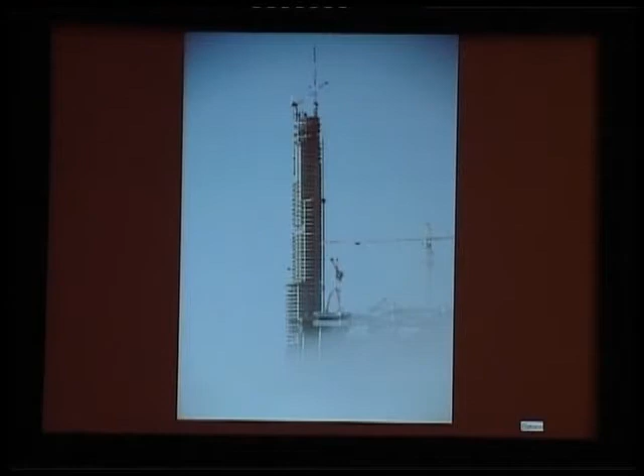is that there's only one main road through the city, Sheikh Al Zayed Road, and the problem is that the buildings were getting built before the infrastructure and the city itself. And so what happens is that you have a place that you can't get around in to go to buildings that are quite dramatic to look at, but there's really no street life that's worth living. And it creates a lot of problems in the long term.

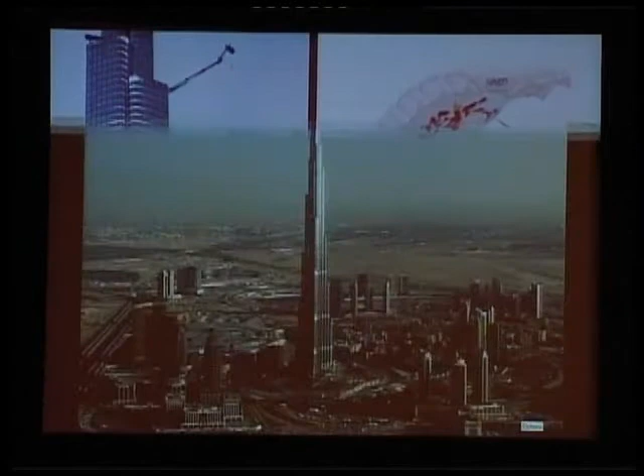And with the opening of the Burj Dubai, now renamed, they've achieved a great spectacle, and you know, here they even had people base jumping off of it at the opening, which is quite high in the air. But one of the issues that is a real thing is that in the exuberance of doing this, they never paid a lot of attention to how you get around.

So you have Sheikh Al Zayed Road here, they have a loop road in here, and a road connecting over here, but this loop road is going to become like downtown Mumbai. It's never going to be able to handle the capacity of the area, and so they've borrowed into future problems because they didn't pay enough attention.

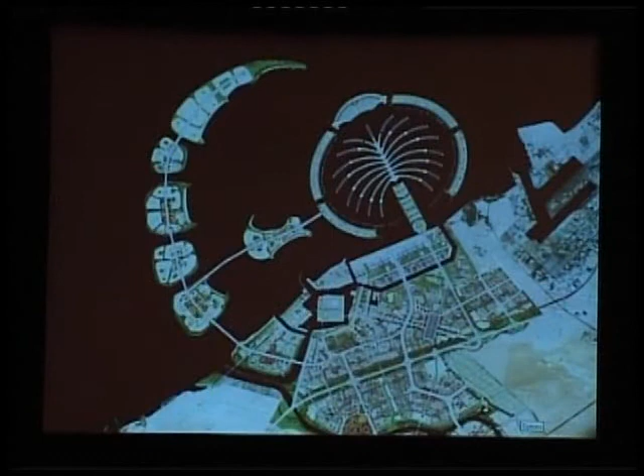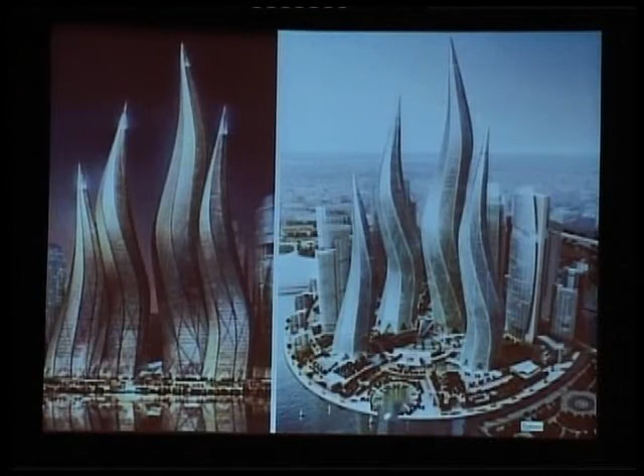At the Palm Island here, at least they have a people mover system, and just to conclude on this part quickly, this era where the buildings got wilder and wilder, competing for attention, all kind of wound up with a big collision that we've had recently. And the collision is basically a combination of primal forces, and they've changed the world.

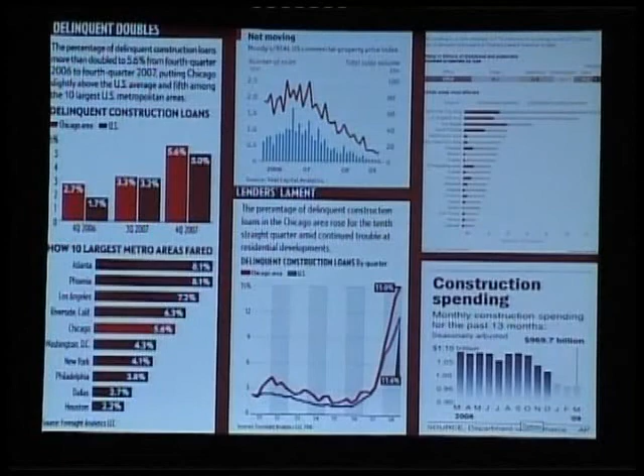And the first force, of course, is the economic one. We finally got to the end of our rope of exuberance, and we ran out of money in most places. Not in China, not in other parts of Asia, which is a good thing, but even China had to dump billions and billions in order to work on infrastructure to keep things at a good pace. And they've actually succeeded quite well, I believe.

And the next one, of course, is global warming, which everybody is talking about now, but the need to act is quite more dramatic than just the talk. And one good example of that is that, you know, I think it's fabulous that China and India and places in Asia are succeeding and getting wealthy. And we're doing a lot of work in China. We've been there for 6 years.

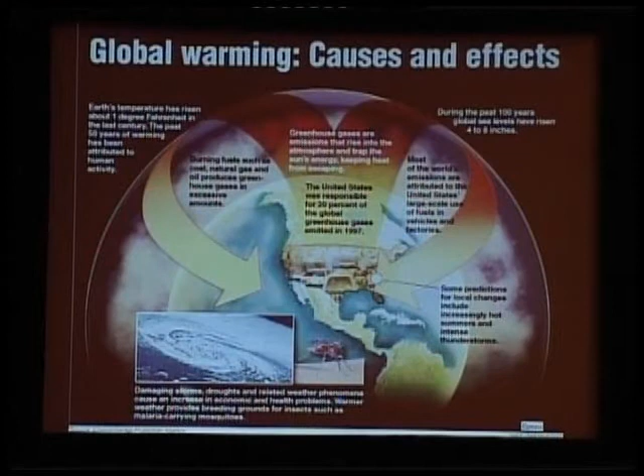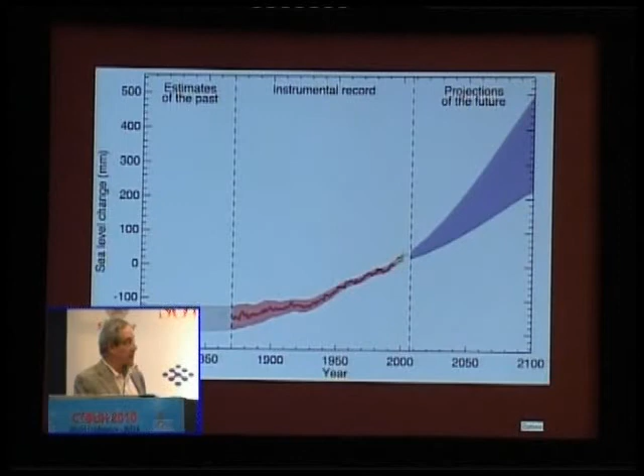But wealth brings with it the ability to buy cars. So you've already got gridlock in both China and in India, and the pace of buying cars is only going up. So there are significant issues we got to talk about. At the same time, drinking water is going down. Water is a great issue in terms of the consumable side, and it's a great issue on the business of water in the environment, and this is about sea rise, okay? So on one hand, we got too little water. On the other, we got too much water.

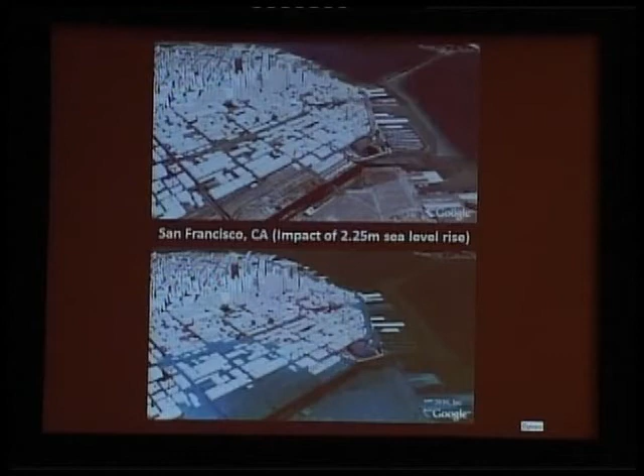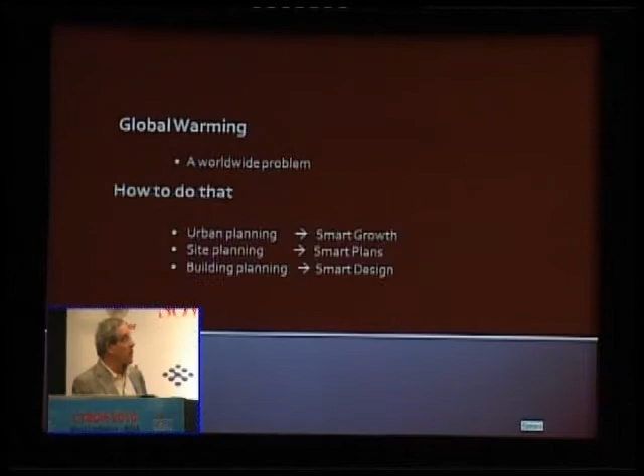So at the end of the day, sustainable buildings alone are not enough to save the world. We have to develop policies and practice sustainability on an urban and on a regional basis. So just some of the points that need to be focused on about global warming is that the main cause is carbon dioxide, which creates the issue of the heating of the atmosphere, and that's all coming from cars, buildings, and other forms of activity in life.

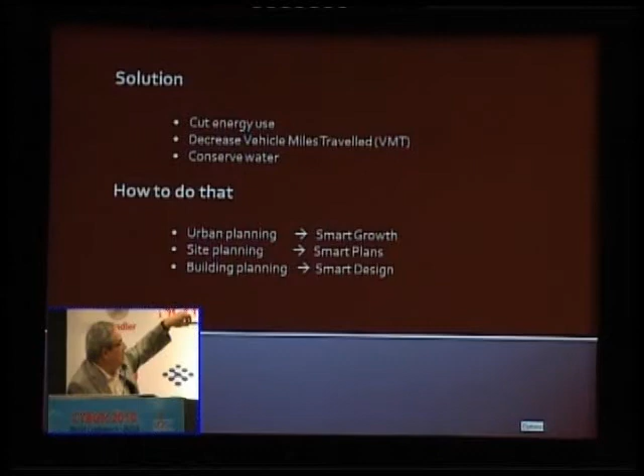And the solutions are a series of elements which have to do with how we deal with these things, but what we can do as professionals is deal with the urban planning issues and smart growth and site planning, and making smart plans, which I'll get into a bit, and then smart design in the buildings themselves. And these are the principles that we talk about. I'm going to be brief about these.

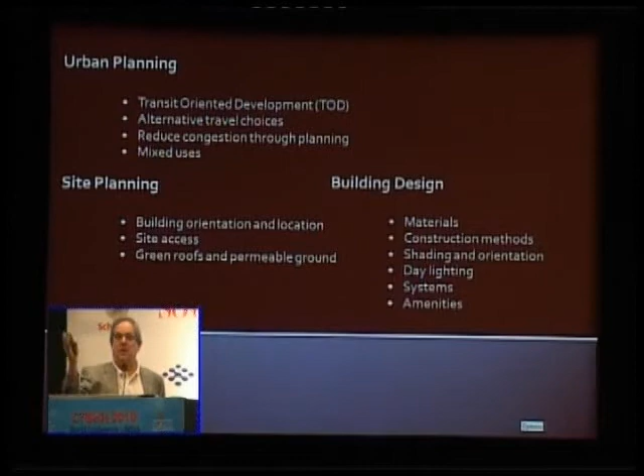But in terms of smart planning, transit-oriented development is really the main key to helping change the world, because what you have to do is get people out of cars. And the fundamental principle about getting people out of cars is convenience. If you don't have convenience in your transit systems, people won't get out of their cars. If people are in an hour-and-a-half traffic jam to go to the center of Mumbai from here, and there's a convenient way to do it, they'll do it if it saves time and it's convenient to access. So that is a critical piece, and I'll talk about that a little bit in the Guangzhou plan.

Just in general terms, the number of cities that are engaged in America in green building programs and site planning is growing all the time, pardon me. And the number of people living in green cities, in cities with green policies, is expanding all the time. And we need to do this as fast as we can.

So let's talk about Guangzhou. Guangzhou is divided into two parts, north axis and south axis. We were invited by the mayor to work on the north axis of Guangzhou. He came to me and said they had a new plan, but he wasn't happy with the plan. It was not sustainable. It was more formalistic than sustainable. What could we do about that? And I went to Guangzhou, and what did I see?

I saw that cars have more importance than people, and so they're taking all their streets and they're putting dividers in them so that they improve the traffic flow, but it means that people can't get across the streets. And so what do they do? They have to jump over the fences and so on. And they've done exactly the wrong thing, which is they keep trying to solve the car problem.

And what I've told them, and what I would say here in Mumbai, the same thing: you cannot solve the car problem. You will never solve the car problem. It's only going to get worse, so you must solve it by thinking alternatively. So in Guangzhou, what they did was they just separated people from the street and made you go through pedestrian tunnels to get around.

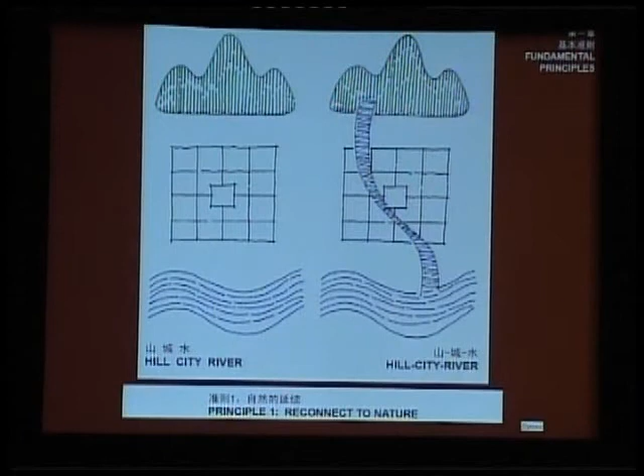So you have to start really at the beginning and reconnect the city to nature as a fundamental principle, but you've really got to believe in that. I mean, you can't just say it. You have to believe in it. And in Guangzhou, water, nature, are the things that tie it together.

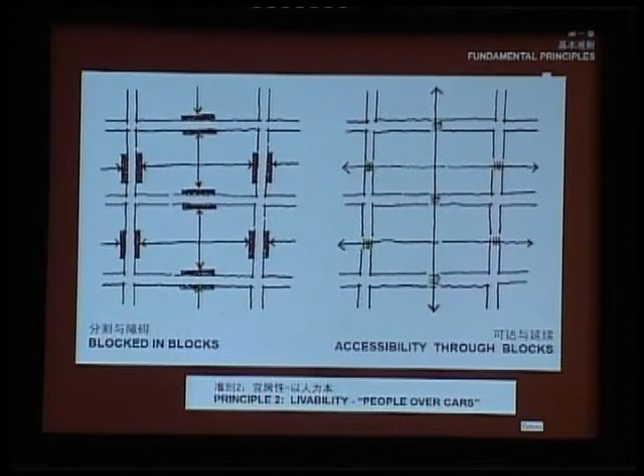The other thing is you have to give up the idea that cars are more important than people, and you have to make people and their getting around more important than cars. Easily said, but extremely hard to do. Extremely hard to do. And then, as Bernardo said, you have to deal with the heat island effect.

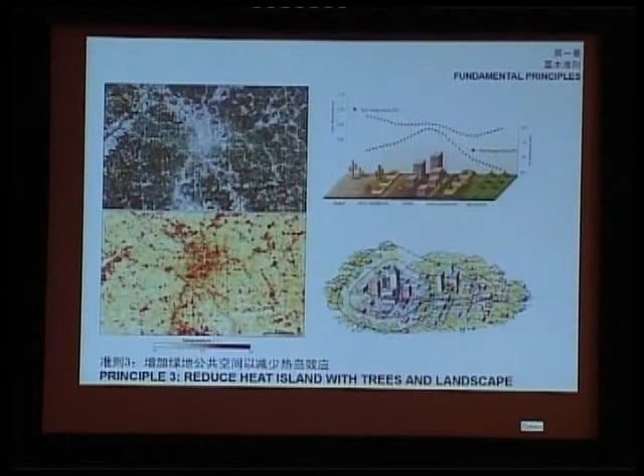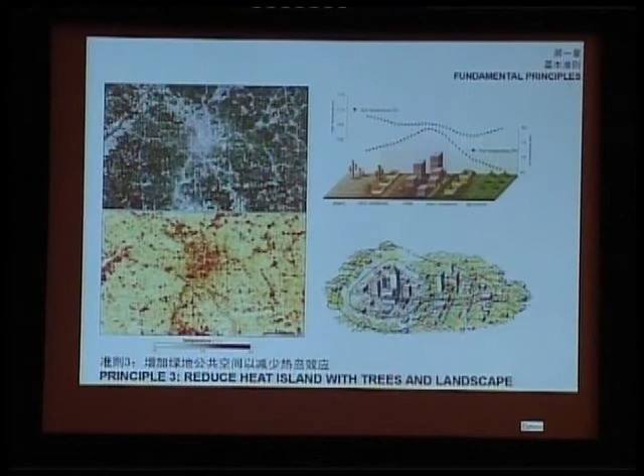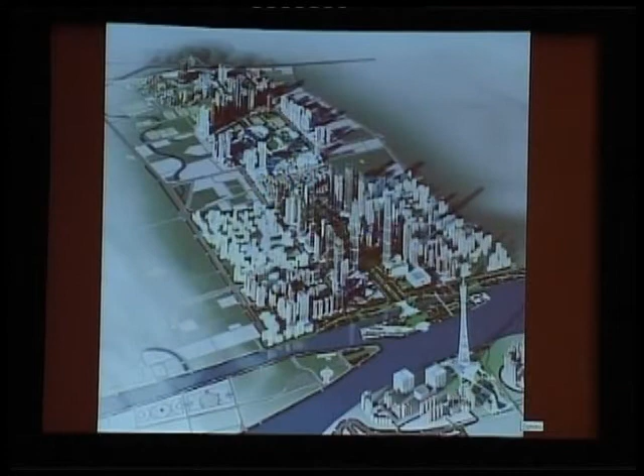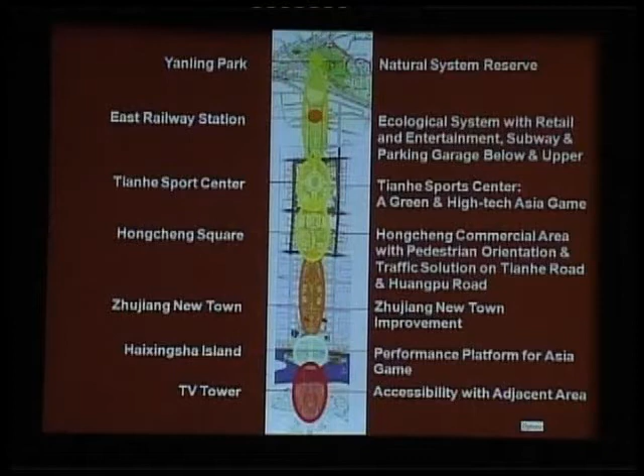So the first part was this North Axis plan. And it starts at the railway station here, goes to the north part of the Pearl River and the new TV tower that Arup did. And the plan was kind of developed, but it was just another one of those plans that was divided into a series of places completely disconnected from each other. And so we took each of the districts and dealt with them one by one to reconnect the city together so that people could live and work and walk and get around without having all of the barriers that you get in a city that's really out of control.

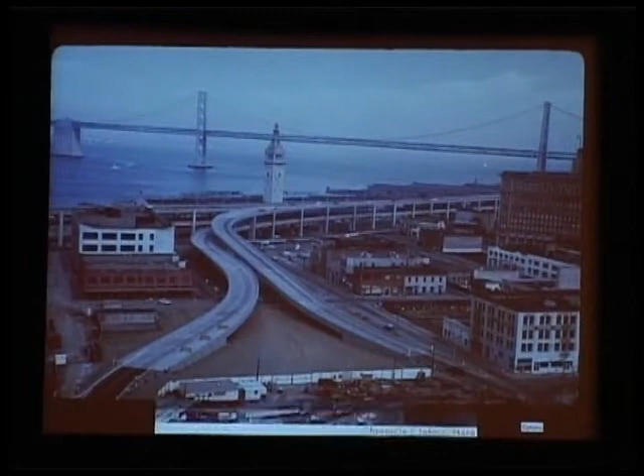So the first thing was the surface connection. And we showed them an example, which is quite a good one. In San Francisco, we had the freeways done in the 50s and in the 60s. And the freeways cut up the city into bits and made it quite unpleasant and really reduced the quality of life. And they cut off our landmark buildings like the ferry building from the streetscape. And this was the whole idea decades ago that the car is more important than the people.

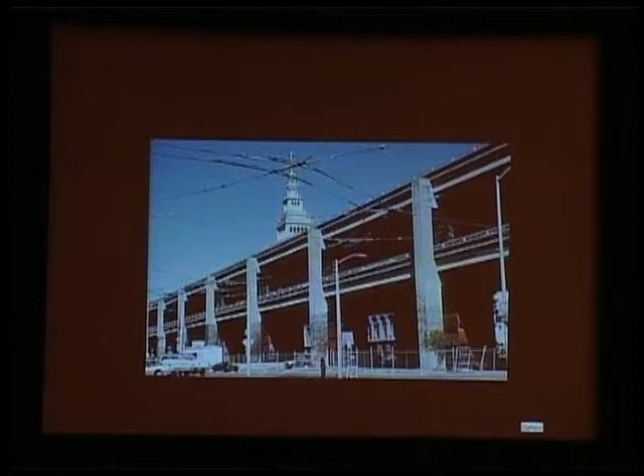Well, we actually had a freeway revolt, and we stopped the freeways. I wasn't there, but we had a freeway revolt, and we stopped the freeways. And then I was active, as were many other people, including my partner, in getting these things torn down. But it took the earthquake to tear them down, but we finally got them torn down. And we decided in San Francisco that people were, in fact, more important than cars.

And guess what? We still have a surface road that works, and we've created all this green space and plaza and connected the city back to the waterfront, and it hasn't hurt the traffic at all. Didn't do a damn thing to make the traffic worse. Made it better. And it made our lives much better. And this is a great example. So, you know, other parks in the middle of the city.

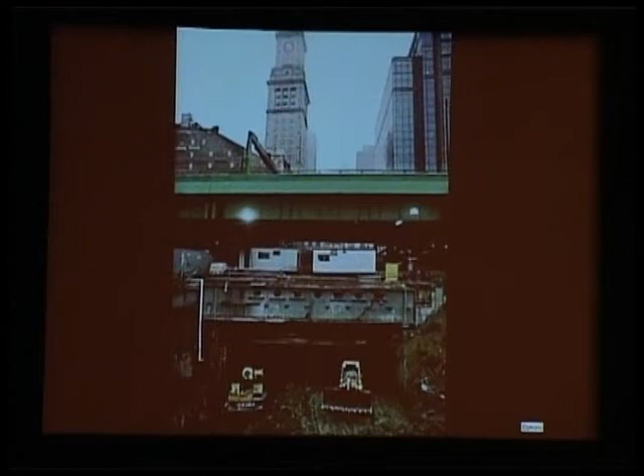Boston did the same thing with the Big Dig. The Big Dig has had many technical problems, but it was the right thing to do. They took this freeway which killed the center of Boston, and tore it all out and created a linear park that connects the city back together. Okay, a huge, expensive project, but it showed what you should and could do.

Now, what Mumbai has as an advantage is it didn't build any of these ridiculous freeways. So you got a good start. You don't have to undo a couple of decades of mistakes. You just have to do the right thing. And then, of course, Millennium Park in Chicago, another wonderful spot.

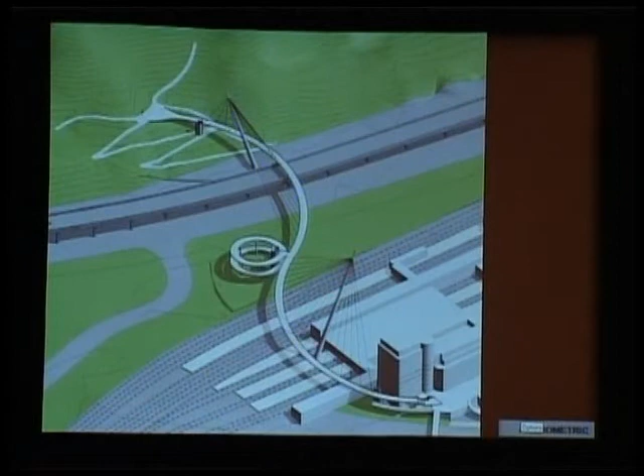So, you know, we had to do some undoing in Guangzhou. And the first thing we had to do was connect the north part of the city and Yanling Park here to the railway station and the south part. And they have this big superhighway. They have the railroad lines. And the only way you could get from one part of town to the other was through a little tunnel underground that somebody charged a fee for, or you could take a car or a bus.

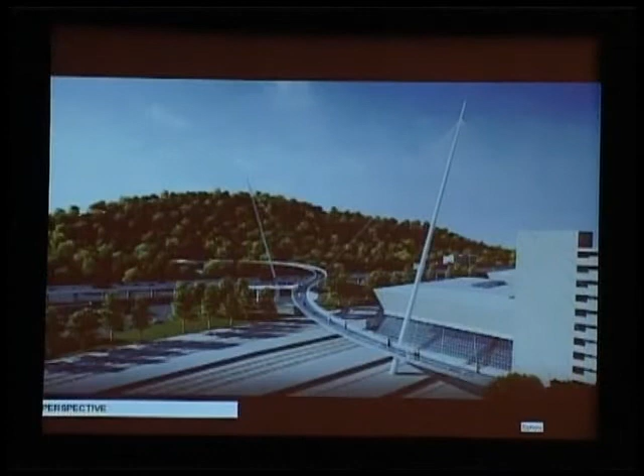So we said, let's make a great pedestrian bridge that links the north and the park, based on many models around the world, to the rest of the city to the south and the railway station, and make an elegant transition. Sorry, going a little too fast. So you know, we create this pedestrian bridge that links you to the railway station.

And then the next part, we just moved from the north to the south. The next part was the railway station itself. Somebody had the bright idea to create a plaza on top of the railway station so that the whole entry and exit, the major statement about getting into town, is this big dark cavern of a place, which is as unpleasant and hot as it can be.

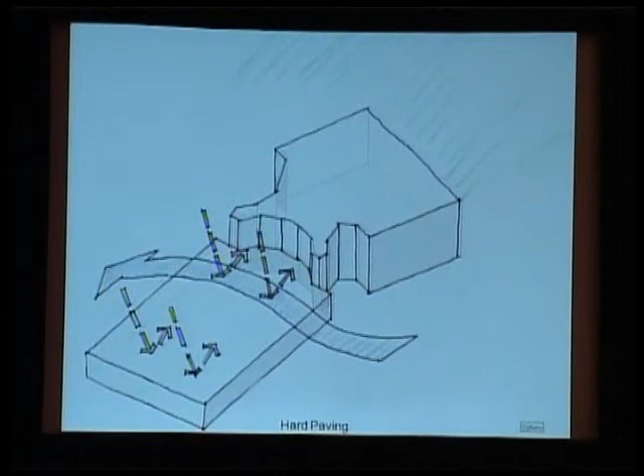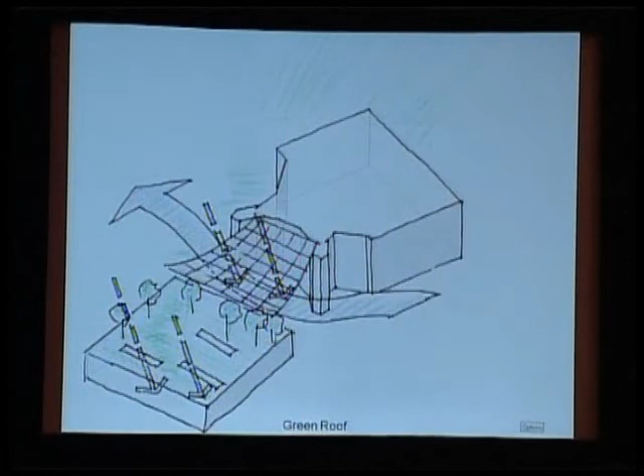So they're actually doing it. That's what I love about the Chinese. Okay, we did this about, I don't know, 7, 8 months ago. It's halfway done, and they'll have it ready for the Asian Games.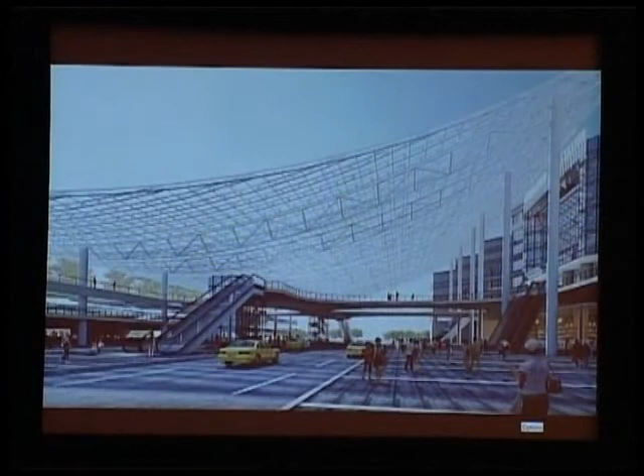It's really something. And then again, with the issue of the connectivity, speaking of the Asian Games, to the stadium, here you are, the hardscape, you can't cross the road. And we said to them, look, you go into the park, and the temperature, as Bernardo mentioned in his example, the temperature under the trees, which, by the way, is where everybody is, right? They're all hanging out there. Why? It's because it's more than 20 degrees cooler than in the sun and on the pavement, and maybe 50 degrees cooler.

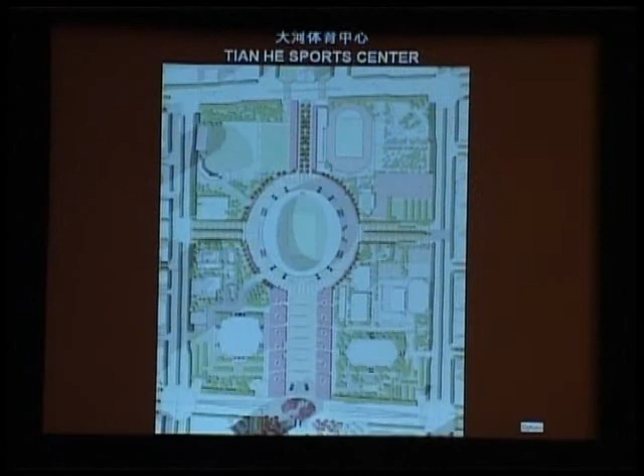And so the greening of the cities is another extremely important lesson. It's probably more important than almost anything that's said at this entire conference. So we said, let's re-green the whole sports area. And this is the Tuileries in Paris, and went through a process there.

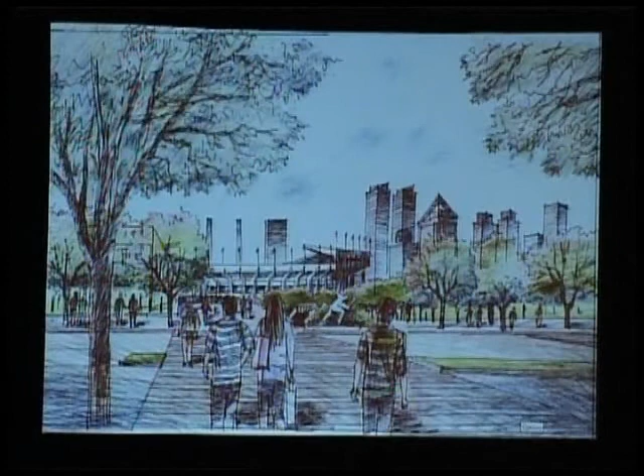And then we had another road barrier moving, again, south of the sports center. And we said, let's change all that, make connectivity across the roads, and let's create an important node, which is the bus rapid transit station. Now, the plan was that they were going to put the BRT right on the surface and keep the road. We said, don't do that.

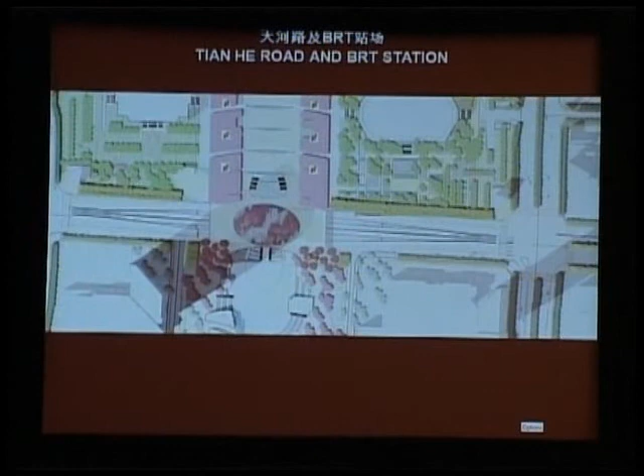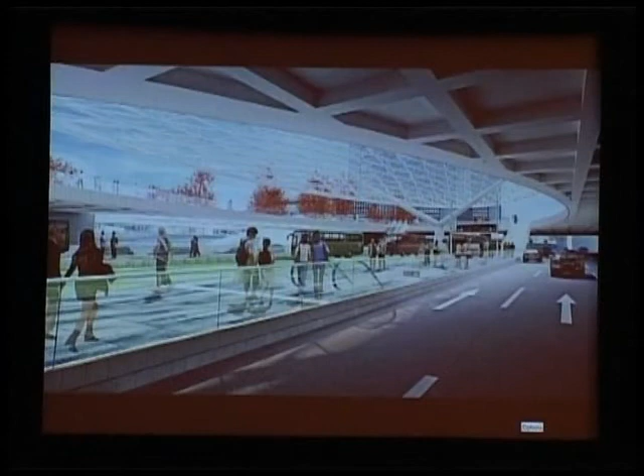Let the people be at the surface and cross the road and drop the whole road down and create this BRT transit below the level, and all the cars below the level, just ramp the road down like this, and then people go up or down to the retail, et cetera. But it keeps the pedestrian connectivity along the axis without any barriers.

And then we moved from there south to another major principle, I'd tell you, and that's preservation. Driving all around Mumbai yesterday, there are a lot of really incredible older buildings. And as the values go up, a lot of those, if they're redone, the same thing. So the central axis, they're going to blow all these buildings out here. They're going to just tear them out and keep the axis going.

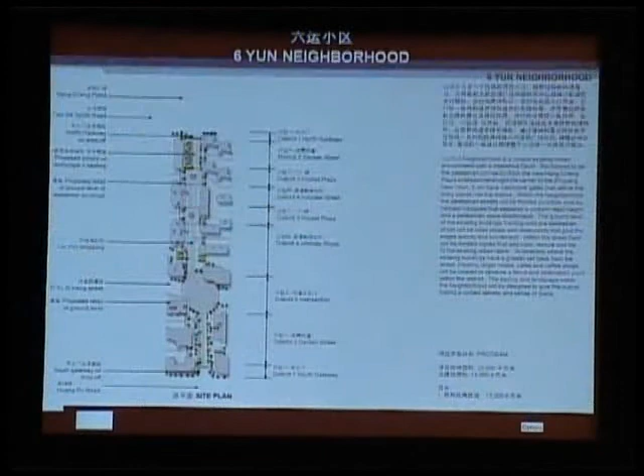So you don't have to do that. You don't have to rip out any of them. What you do is you create an urban experience through the existing buildings. There's plenty of room for it, and it'll be more interesting. And we said, look at Xintiandi in Shanghai.

Xintiandi is this mix of new and old, where they've preserved older buildings in the center of the high-rise development and created a lake. And they've taken the older buildings and made high-end retail. And guess what? All of the buildings that they build around this preserved area are the most valuable buildings in Shanghai. So we said, just do the same thing here.

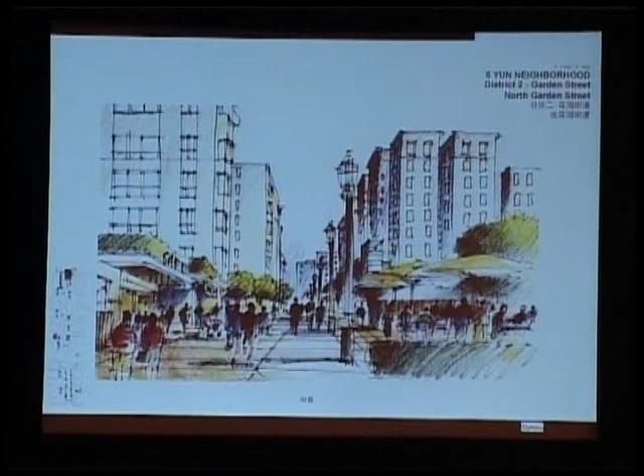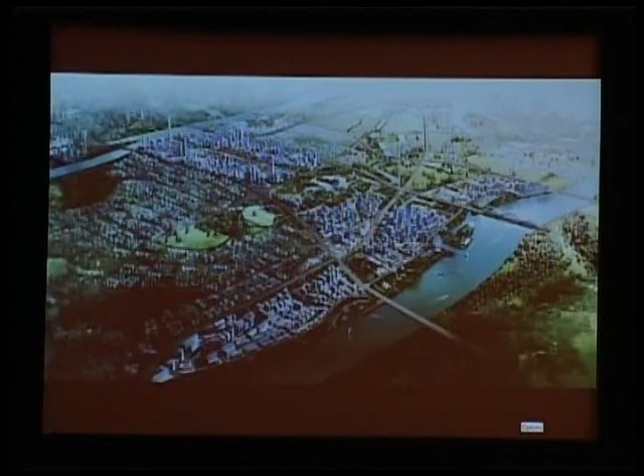And so what we're doing is we've planned through just a meandering way through the existing buildings. We've saved about 3,000 residential units in the process. So from that invitation, we then competed for the South Axis. In the South Axis competition, we won recently, and that goes to the next stage in Guangzhou, and it goes from the North Axis here all the way down and along the south edge of the Pearl River.

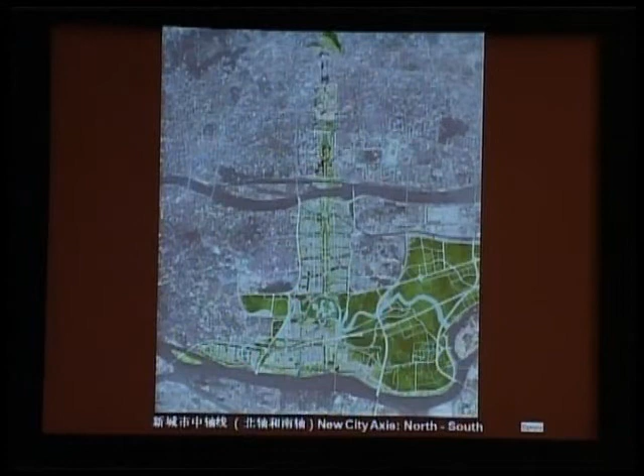And the same principles apply, which is, this is the North Axis here, this is the South Axis, is connectivity and sustainability and livability. And so what we did was we created a master plan strategy which is linking of all the landscape elements, both designed and natural, as the guiding way through the whole plan. So what you do is you read the coherence and the organization of the plan of the city of Guangzhou through its green spaces. And then everything else organizes around that.

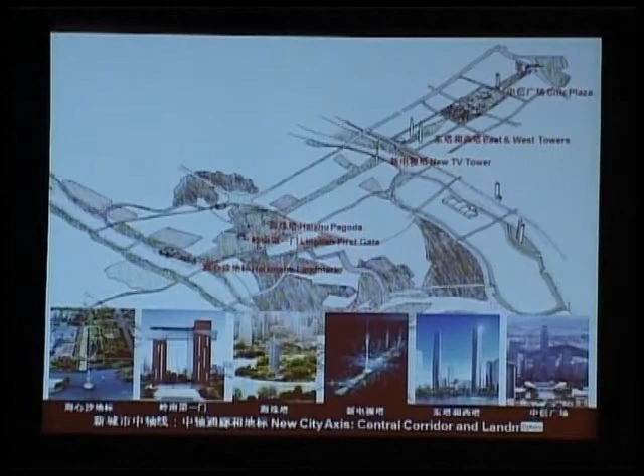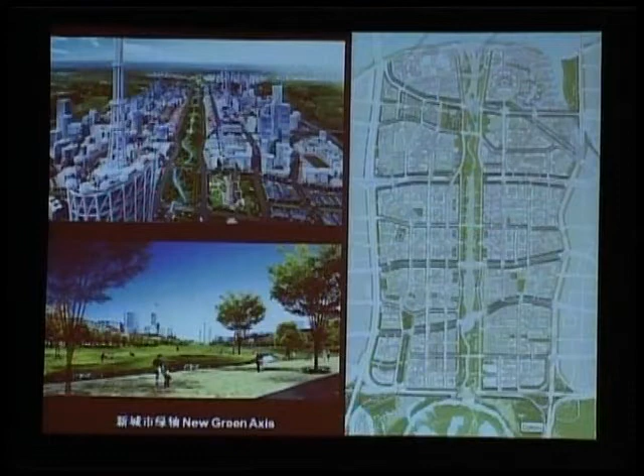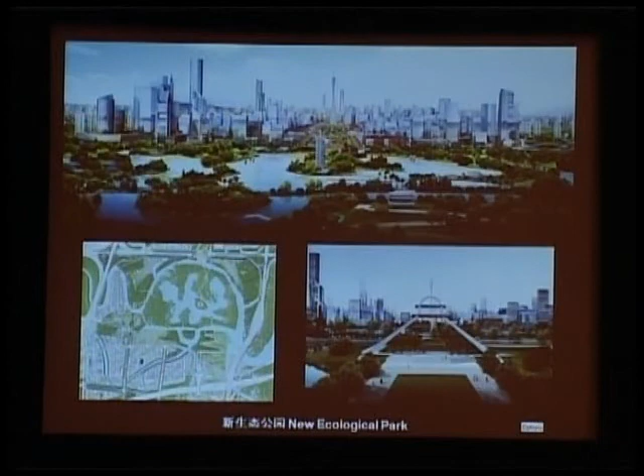So we talked again about the sustainable principles of this organization and the creation of the greenways, both north-south and east-west, which link the city together but create real usable green spaces. And in terms of hydrology, there's a giant retention lake in the middle, which we create a park out of, but it's still a flood retention and water supply reserve. And it's linked into the whole landscape process.

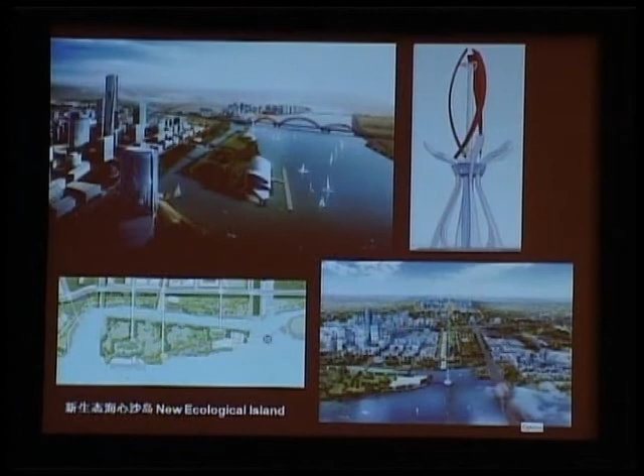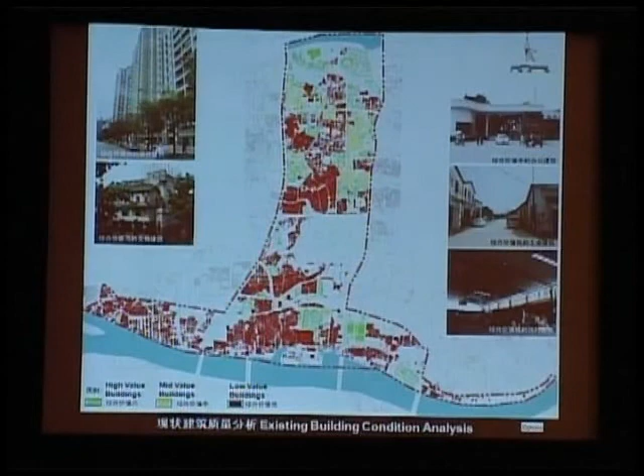And then we get down to the south edge and we take the island that's there, it's kind of an industrial island, and make it into an ecological island with also some cultural buildings on it. So the whole plan for a distance of, by the way, about 7 miles is linked together in a way that you could actually follow it through. And the other process was the evaluation of existing buildings, what you keep, what you don't. Extremely important.

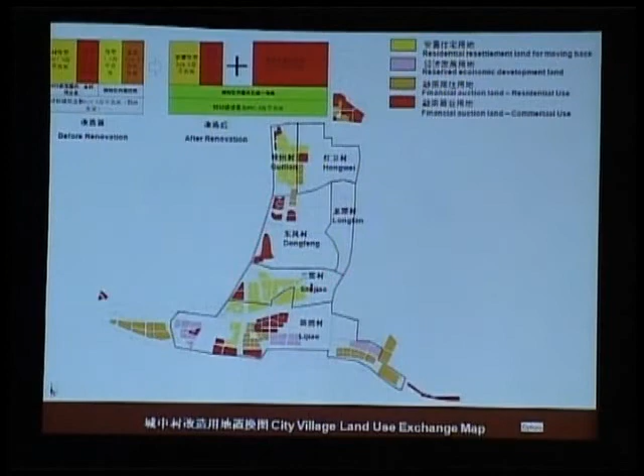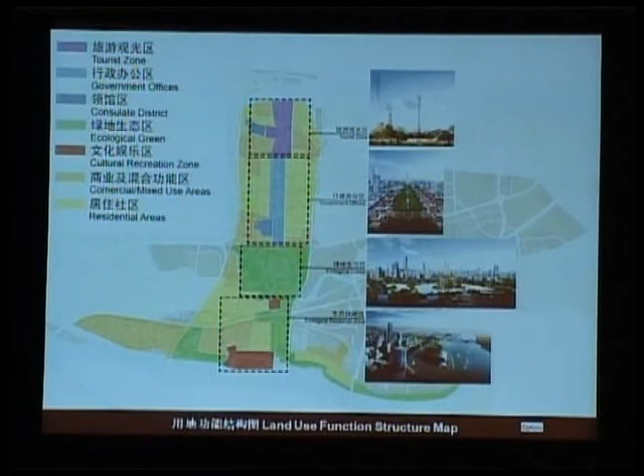And a unique thing in Guangzhou is the Guangzhou villages. These are actually the original villages that were the city, and they grew up in a very unusual way, kind of like some of the parts of Mumbai, where the buildings are all cheek by jowl, just completely built out of control in the 60s and the 70s and even the early 80s. There's like zero lot line on all 4 sides. And part of the process is what do we do with these villages and how do we relocate people sensitively while we do the redevelopment. So we've created a series of strategies for doing that as well.

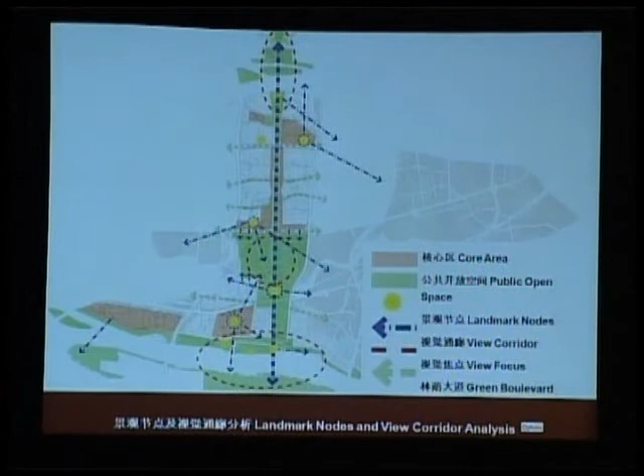And organized our plan in terms of the various nodes of high-density urban and landscape areas. And this is actually another really important piece. This piece is about how do we create the density in an orderly way and a sustainable way. So the first thing we look at is the overlay of the grid of the subway system and where the stops are. And then the next thing we did was we proposed a light rail line. This will be the first major light rail system reintroduced into China, and it will link the whole plan together and link the railway stations, the subways together.

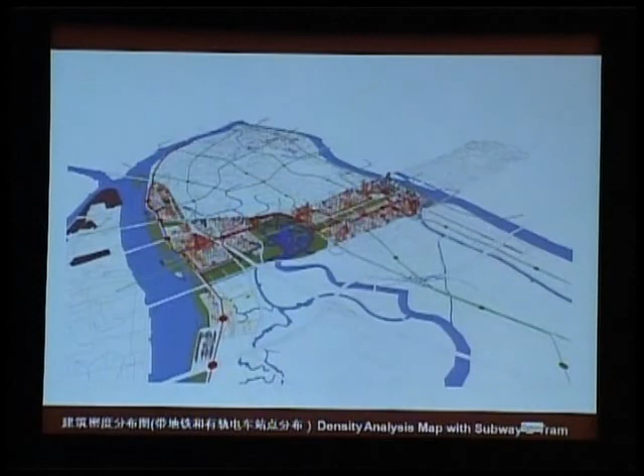And the thing about light rail is it's less expensive, it's highly accessible. Remember, I talked about convenience and getting people out of cars, okay? You can get out of a subway station, hop on a light rail, and the light rail stops easily every block or 2. So given the traffic situations, you say, well, why would I bring a car when I can get around as easily as possible? And then the key to it is the nodes of the transportation system become the areas of highest density. That's what smart growth is really about.

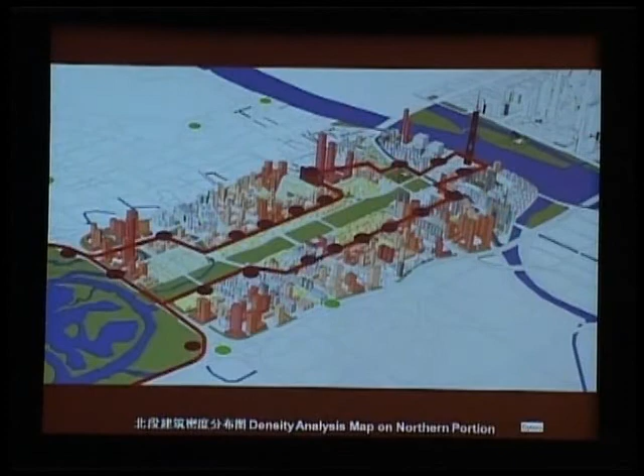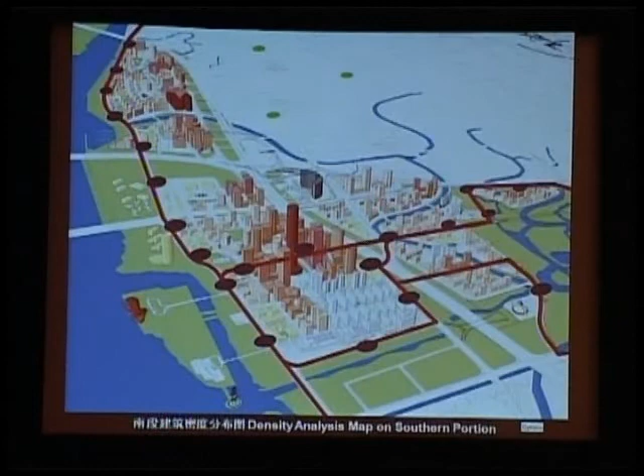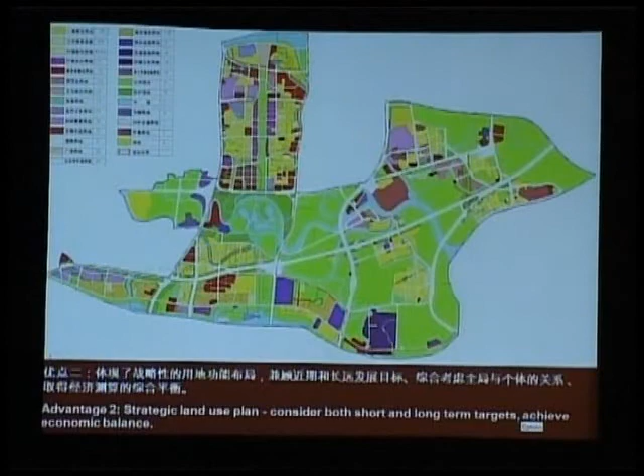So you tailor the skyline to the transit system, not the other way around. And in doing that, you create the ability to create very high density without any meaningful impact, as opposed to just letting big buildings be wherever they want. So this density diagram falls out of that, and the land use pattern the same, and we can then work with the city to determine the ultimate area densities without any negative effect, because we just adjust the highest densities to be around the transit areas. So you start with your overall infrastructure plan, and you make that the basis for the planning process.

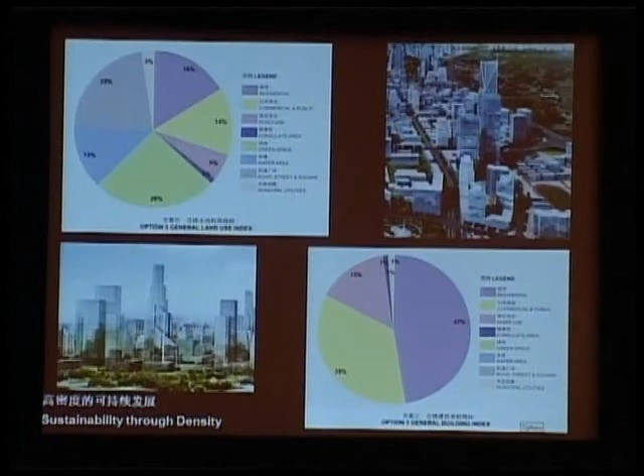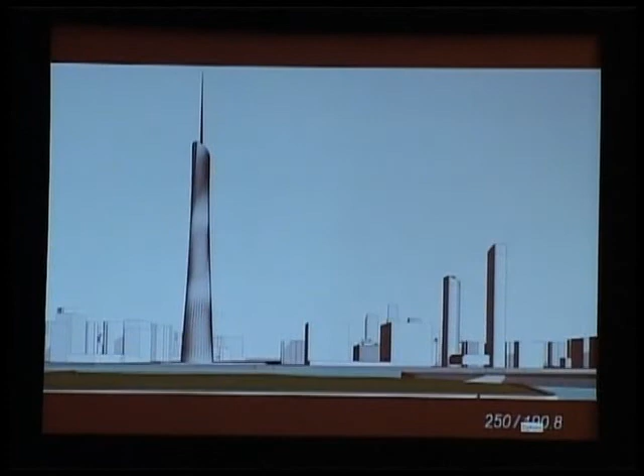And also the mix is extremely important, because in terms of livability, you have to have all kinds of uses: residential, office, commercial. So once we do all that, then you can start looking at how you develop the tall buildings, where they should be, and linking the whole thing together in a coherent way. And we've done a couple of studies, this is the TV tower, on some very tall residential towers by the river.

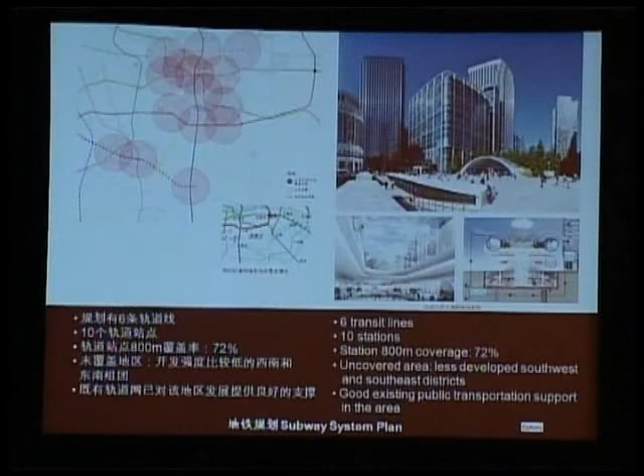How am I doing on time? Okay.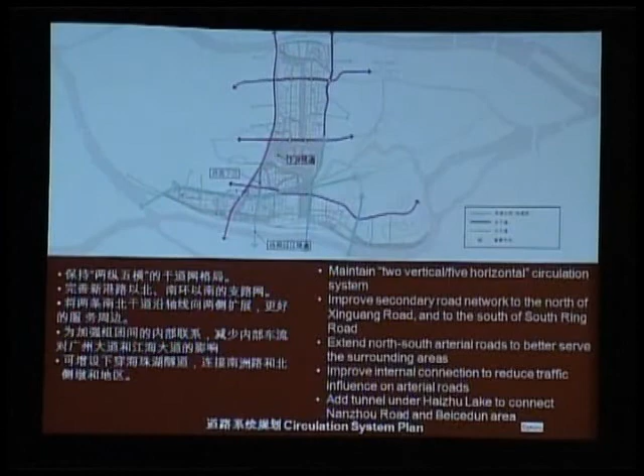You know, the whole idea of the light rail linking the city along treed boulevards, and then also discriminating carefully between the through roads and the local roads, so that the through roads don't disrupt the neighborhoods. That's another part of it, and relying much more on water transportation there, because you can do that in a

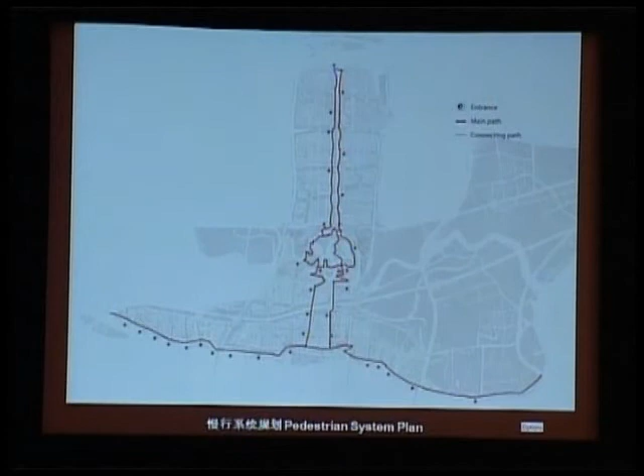great extent. And then also looking at pedestrian pathways, both for recreation and for moving around the city, and the kinds of paths and pedestrian bridges and things that will come out of that, and the places to go in the midst of the high density city area.

So just quickly, and then I'll be done. Just so you know a little bit about us and the projects in terms of sustainability. This project in Emeryville, which follows all those principles, was the first LEED Platinum neighborhood design ND plan done.

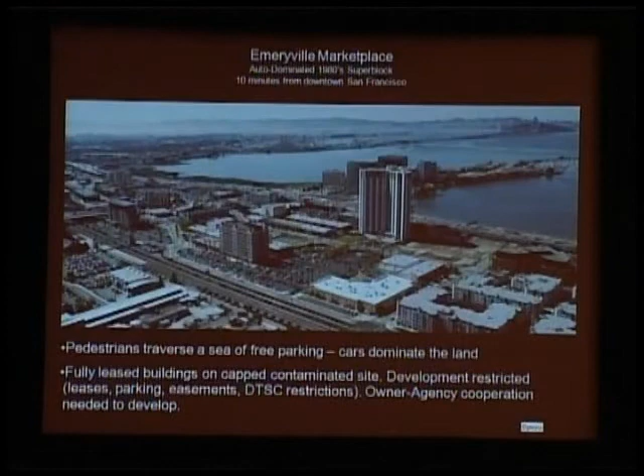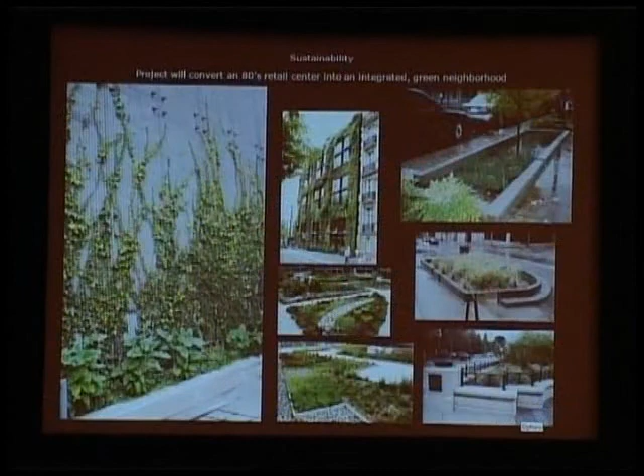And we took a very traditional sea of cars parked around a building and transformed that through a series of open space and other urban design sustainable principles into a real urban place with a lot of amenities. And so we were very pleased when this came out with the first platinum rating, which is the highest rating possible from the Green Building Council.

And then in San Francisco, this was kind of interesting. We did this building with KPF. This is an office building that, when construction had begun, they decided to make sustainable. We were actually able to transform it into a LEED Gold building while it was being built. And the important point about that is that it shows that doing sustainable buildings is not that hard, nor is it that expensive. It was not a big deal to get there. And that's one of the reasons I show this.

And then we're doing a new tower near the Transamerica building, and the idea of this tower with the Transamerica, it's under the same ownership, is that it's a green island, and not only do we do cogeneration and a lot of other sustainable things, but also we capture water on the block and put it in a cistern, and then that irrigates the park that's part of the plan.

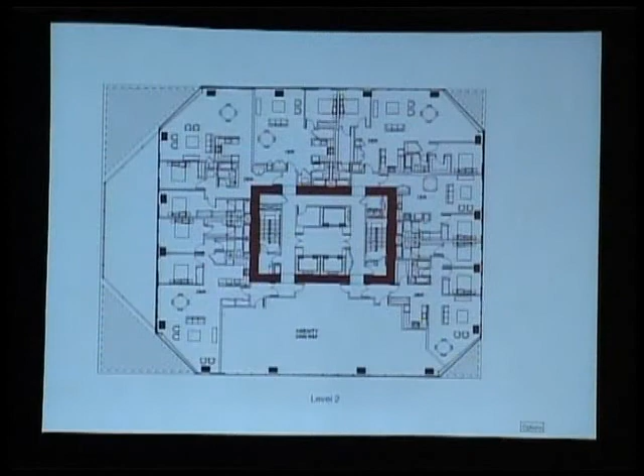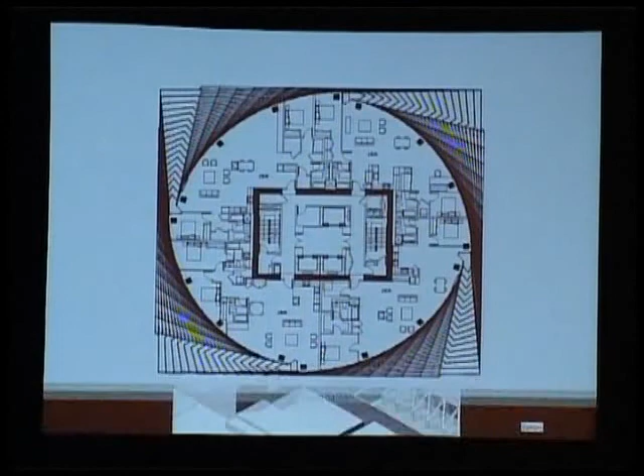So the building is one that takes a twist and goes from a square to a circle, and part of doing that is it minimizes shadows and it minimizes wind and creates a very slender building that complements the Transamerica in form. And creates a more open park, and again, the water policy.

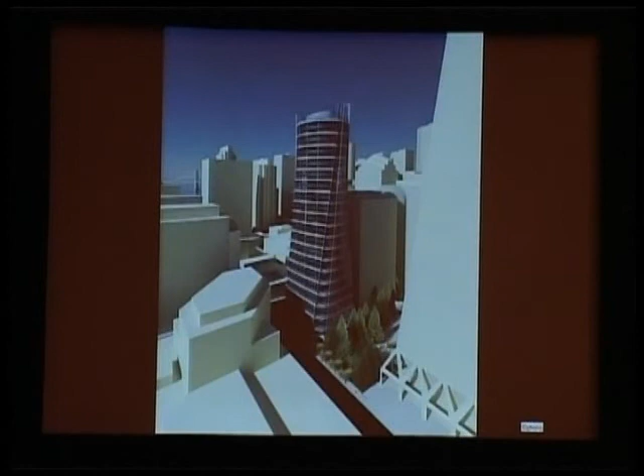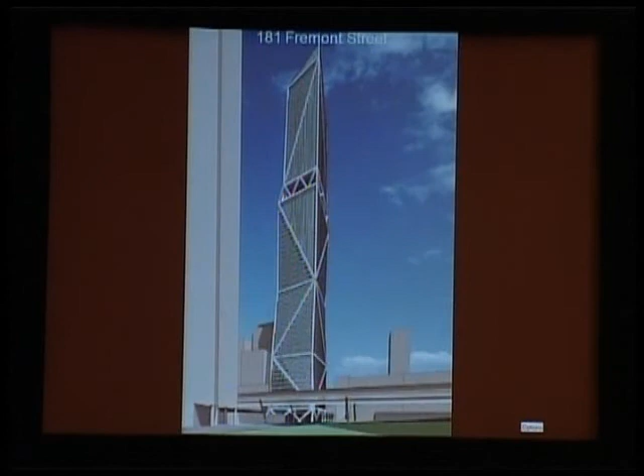And we've done some other tall buildings, which this one is mixed use. This is near the Trans Bay. This is residential over office. I think mixed use buildings are highly desirable in an urban setting, because there's many cogenerative pieces to what you can do.

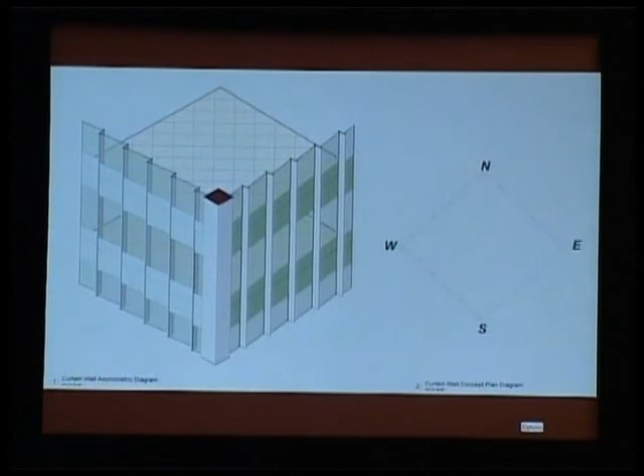And one thing we're doing here is that the glass is on a zigzag staggered, and what that does is it presents more of the metal to the sun as it goes around and shades the glass without creating any physical shading. So we actually achieve a 6% reduction of energy impact on the building by doing that.

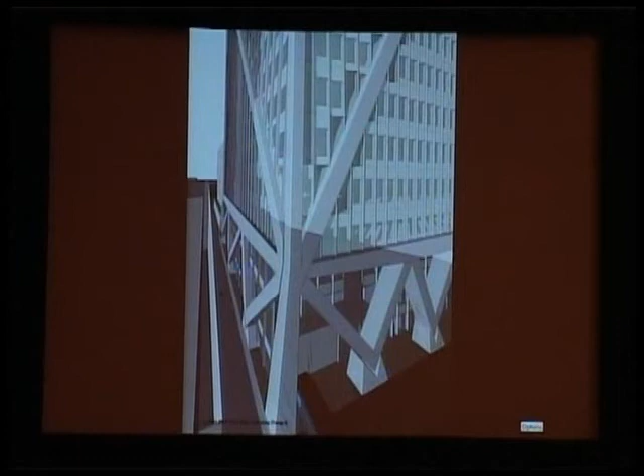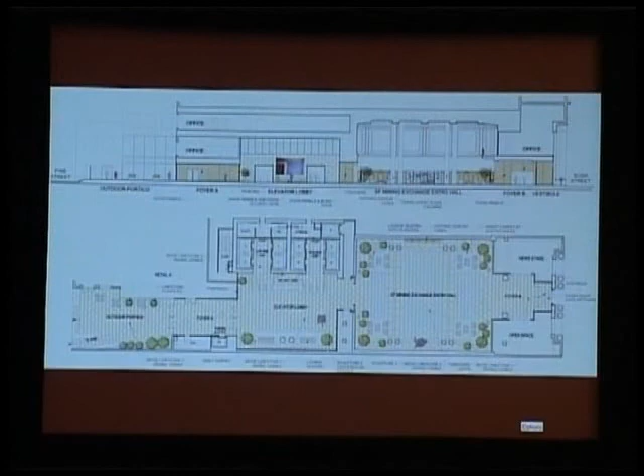This is a building where we've got a historic landmark integrated into the building. This will be a LEED Platinum building actually for the EPA. So the historic building and the new building's lobbies all integrate into one thing.

And then in Shanghai, a building on a site on the river that is also the first LEED Gold high-rise pre-certified or certified in Shanghai, and it's under construction, and the way it's achieved is that as the sun moves around the building, the character of the wall changes to minimize the impacts of solar loading on the building itself.

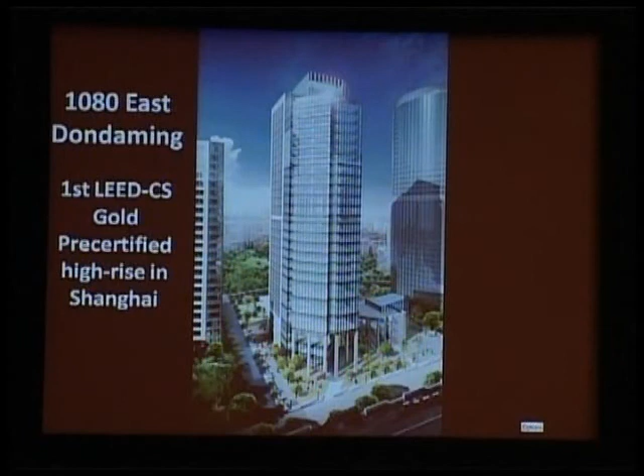So that's pretty much it, and I want to thank you very much. The one thing I would say, I've been thinking about what I saw and experienced yesterday and how do you do what you should do in Mumbai and move around and keep the quality of what Mumbai is about.

And this is a little radical, but I have a feeling that something to be thought about here would be a very light structured monorail system that could get you from north to south, because I think that would go very well with the character of the place without heavy economic infrastructure burdens of subways and tunneling, although you probably need those ultimately.

But there are a number of ways to sensitively handle Mumbai, I think, that would have immediate impact and could be done in a very low-cost way, relatively speaking, and bring the city towards connectivity and sustainability quickly. Thank you.